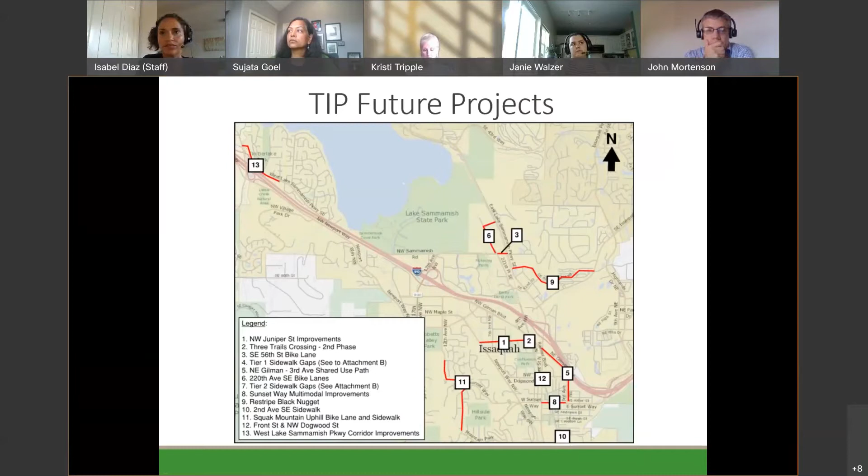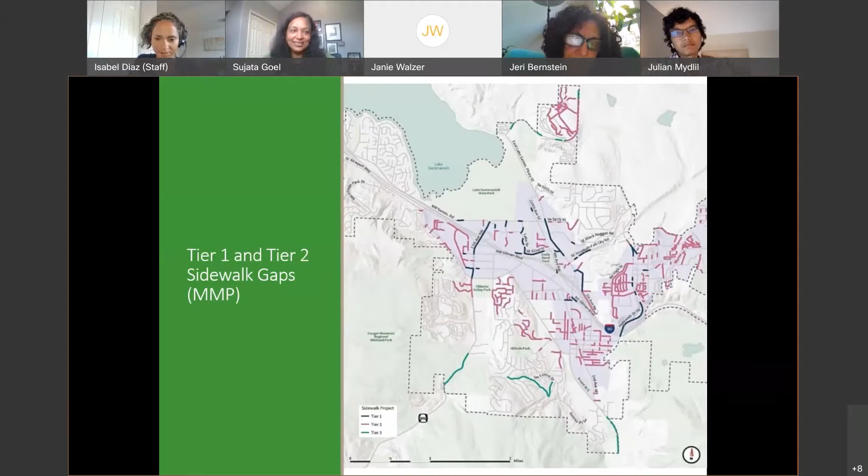It's something the board could provide more specific input on at that time. Yeah, that's something we can do, certainly. Okay, thank you. If there's no other comments, I'll move on to the first project.

For Juniper Street improvements, the main goal of this project is to improve vehicular and pedestrian safety and to provide non-motorized connection between Newport Way and existing trails.

We will be doing so by building a 12-foot multi-purpose trail on the north side, and on the south side building sidewalks only. This project, as currently defined, includes curb and gutter, drainage system, landscaping and illumination. There's a portion of the roadway already built to this standard, so this project will complete the trail along with the road improvements.

One important thing to note with this project is that SEPA environmental documentation will be needed to complete it, and we will also need to determine right-of-way and acquisition needs.

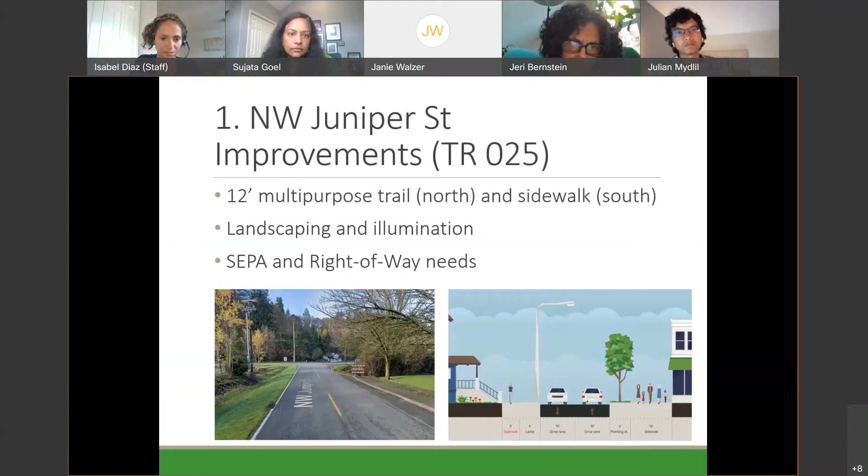The approximate cost of this project is over $2 million. The change we are proposing is, within the project limits, to specifically include those portions that are not completed, like the segments between Newport and 7th, and between Issaquah Coffee driveway and Gilman approximately.

So in this area, we are providing a section where we are keeping the 2 lanes of the road. We are providing 6 feet on the south side of the street where we are only providing sidewalk—there will still be planters, either illumination or planting—and this here is showing a sidewalk, but it'll be the shared use path, shared between pedestrians and bicyclists.

If we go back and think about the goal for this project, which is to improve vehicular and pedestrian safety and provide a non-motorized connection between Newport Way and the existing trails—does the board feel we are meeting our goals with the proposed scope, or are there any other changes the board suggests to make sure we accomplish our goals?

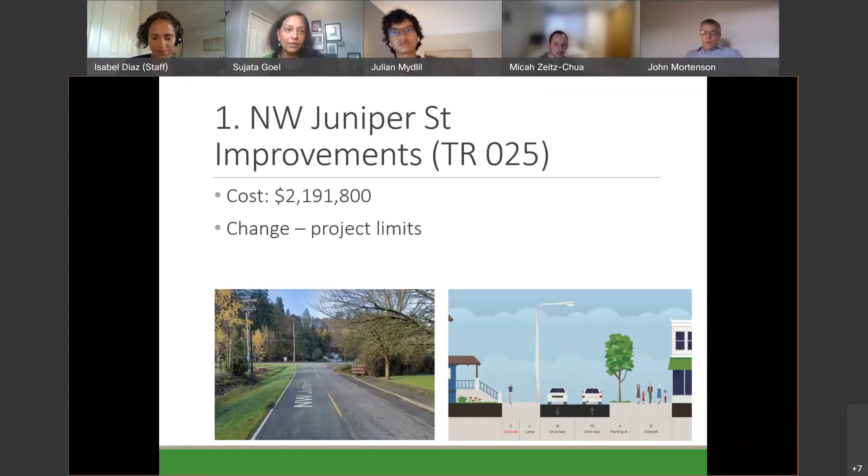Okay, so I think we can move on to the second project: 3 Trails Crossing Improvements. This is the second phase of this project. The main goal is to improve intersection safety and the level of service, possibly by restricting vehicles from turning left from Juniper here onto Rainier.

The crossing—the reason it's called 3 Trails is because of the crossings for Sammamish, Rainier Boulevard, and Juniper trails. So this project will be the second phase, which includes improvements at Juniper and Rainier, and we'll be evaluating access entering Rainier Boulevard from Juniper, given how close it is now to the newly installed signal at this location.

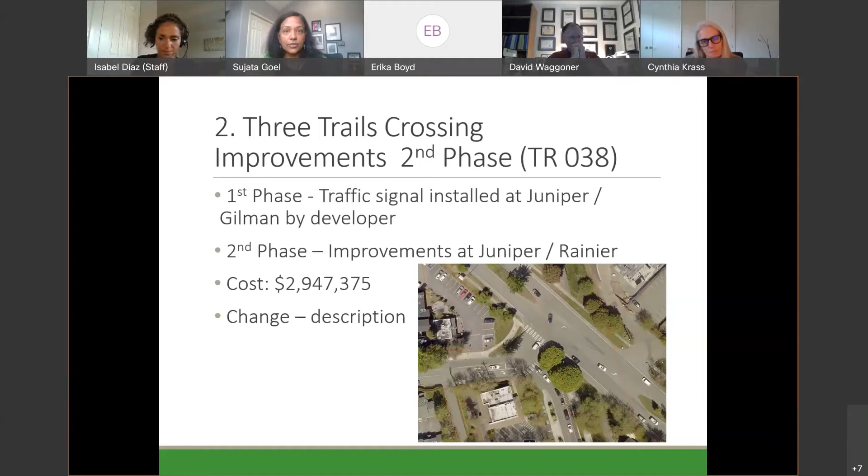So if that one's good, I think we could move on to the next one. Okay, thank you, thank you.

Southeast 56th Street bike lane. The goal for this project is to provide a connection to East Lake Sammamish Trail by providing a bike lane on the south side of it.

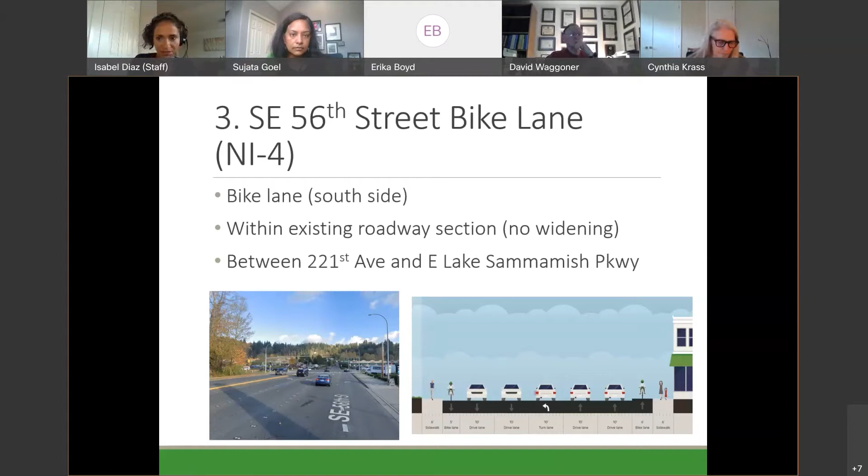We are considering for this one, on the original description of the project, to use only the existing roadway section with no widening. We are specifically talking about that short segment between 221st and East Lake Sammamish Parkway. The cost of this project, as it currently stands on the description, would be between $300,000 and $500,000.

The purpose of the changes we are proposing is to provide an easier connection to King County Trail and added safety to bicyclists. So for this reason, we are proposing this change to specifically include 6 feet of protected bike lane right next to 6 feet of sidewalk. Going back to the main goal of the project, providing this connection to the East Lake Sammamish Trail with these 6 feet of protected bike lane and sidewalk.

Are we meeting these goals? It's important to note that the previous description of the project did not consider any widening, but if we were to put this protected bike lane right next to a sidewalk, we might be looking at minor right-of-way acquisition and widening of the sidewalk area.

Thank you, Isabel. That was actually going to be my question. Are we thinking like a road diet, reducing the lane widths, or some combination of both? Because if it's a $300,000 to $500,000 cost, I was wondering if it was just a road diet, reducing lane width, or if it could be both.

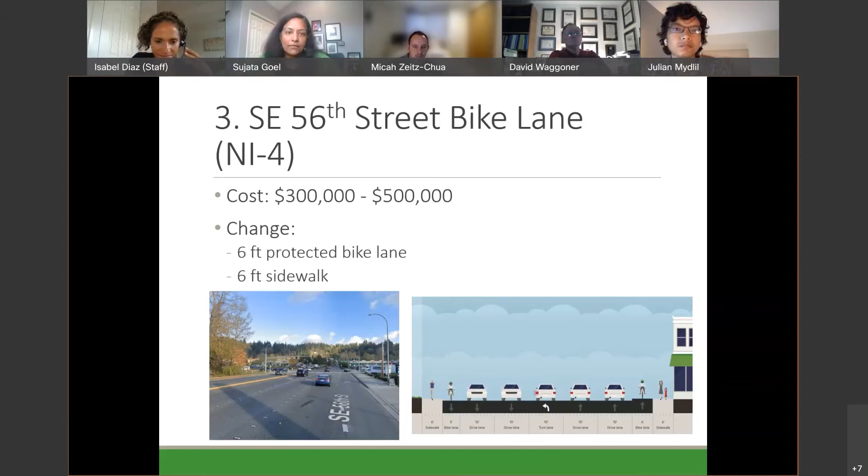And the shared use path will be from where Gilman ends to Sunset Way. The specific bike lane facility will be determined as we go through the design of this project. The cost of this project ranges from $3 to over $4 million as it has been defined. The changes we are proposing for this project are to specifically call the bike lane an LTS2 or better, and to include sidewalks on both sides of the street. The reason for this change is to provide more detailed information on the improvements and the desired level of comfort for the new bikeway facility.

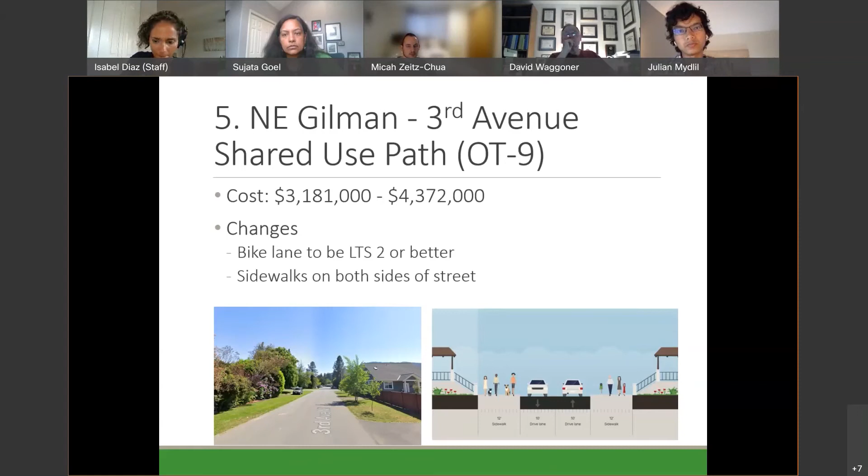On this area here? Yes, so there's 2 lanes of general traffic, you could take out 1 on each side. I think John wanted to add something. Yeah, I think that's something we can definitely look at, because it might make it a little bit easier to accomplish this project, and like you said, it is kind of an underutilized area. The right of way there is 200 feet, so as Issaquah continues to grow, that's definitely a place where new things should be able to come in.

Thank you, Julian. Looking at the chat, it sounds like Jeri and David both fully concur with this improvement and evaluating this improvement. Cynthia had a question wanting to know if the ped-only crossing over the East Fork would remain non-motorized. If so, she would love for that to remain non-motorized, a special path available only to the non-motorized. That could maybe be a piece of design consideration.

I can add a little bit onto that. This project would replace that with a non-motorized bridge that would be wider, but it would be non-motorized - it would not be a motorized crossing. Excellent, that's a good piece of information to have.

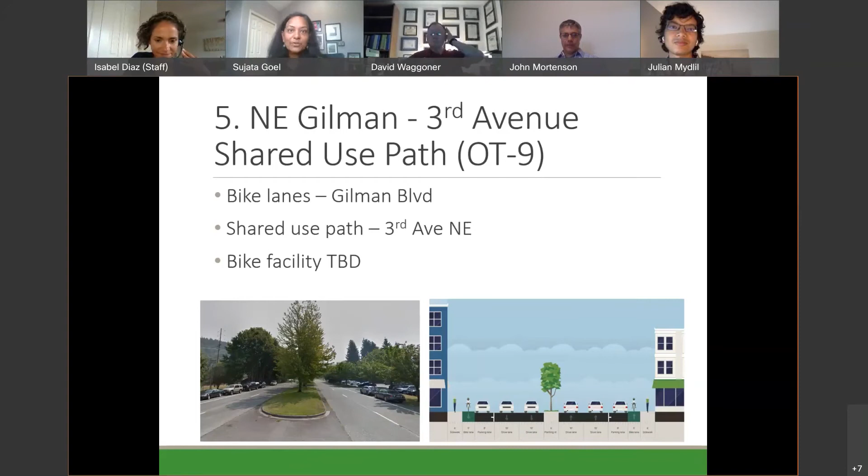So overall it sounds like the board is very supportive. Are you guys getting this theme that anytime you want to add bike lanes or non-motorized paths, we all start smiling and are very happy? So far I think the board is very supportive of this evaluation of this project as well. So if we want to move on to number 6. Thank you for your input.

220th, bike lanes. The goal of this project will be to aid the bike network by connecting the employment areas to the East Lake Sammamish Trail. This project will be constructing 5-foot bike lanes along 220th and 51st Street, on that section close to the section we were just talking about on 56, but on the other side, on the north side of 56. It is assumed that this project can be accommodated within the existing roadway section, so no widening. In order to do that, we will need to accomplish restriping and removal of the median on 51st Street, and repurposing the two-way left turn lane on 220th to accommodate the bike lane.

To be able to do this project, signal modifications may be required at 220th and 56th Street, since we will be removing one lane from that approach to the intersection.

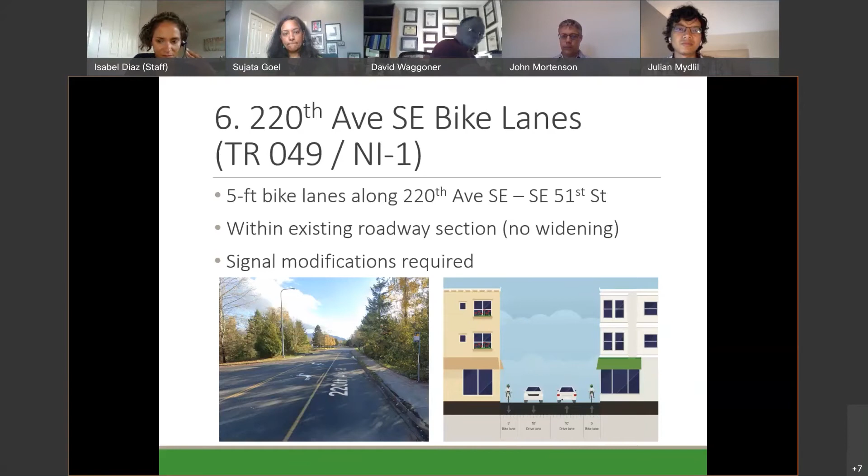The estimated cost of this project is approximately a little over $700,000.

No changes are being proposed for this project. The main reason is because project modifications may have impacts to capacity, and since we are currently going through concurrency updates, we are not proposing any changes until this process is complete. But we will still be asking the board if the scope as currently described would meet our goals of connecting these employment areas to the East Lake Sammamish Trail.

I think David and then Julian. So would that also include 51st that you're going to put bike lanes on as well?

Yes. Just one comment as a former bus driver: if you look on the side, you'll see that's a bus route that goes through there, and there is a bus layover on 51st Street. That's not that important, but my guess is if you put that bike lane in there, you're going to have to contact Metro to get rid of that bus layover. That's the only comment I had.

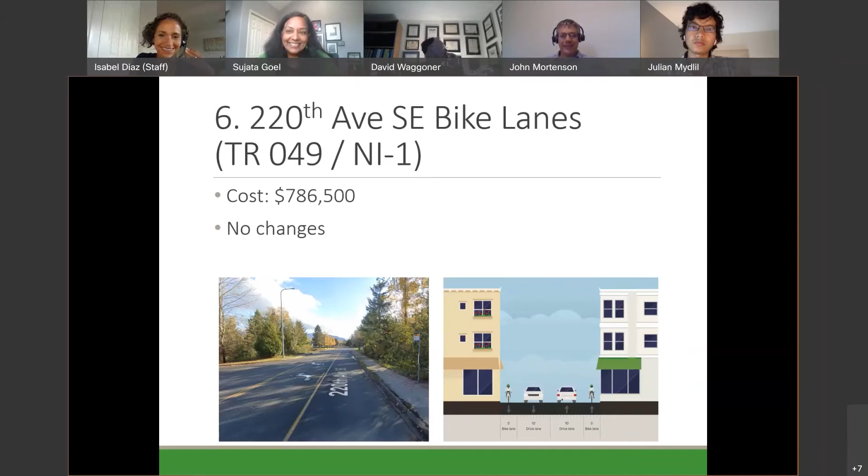Sunset Way multimodal improvements. This project has been identified in the Walk and Roll plan to include a cycle track, and to address operational issues with left turning movements at intersections along the corridor.

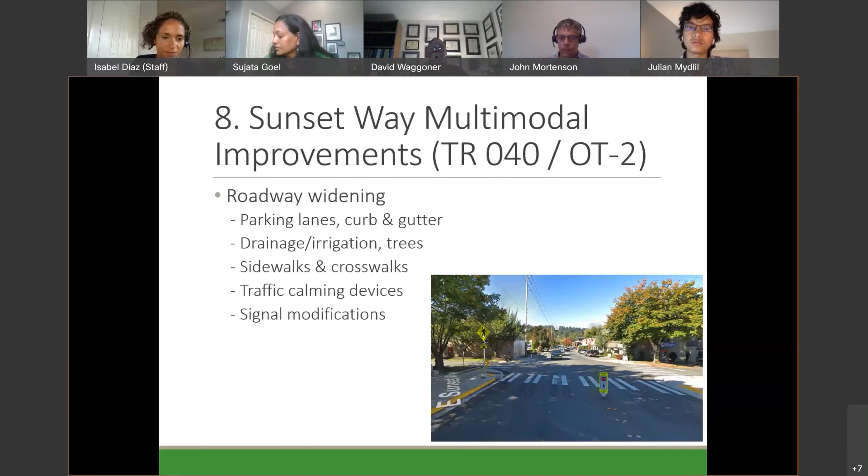This would be accomplished through roadway widening, approximately over 2,000 linear feet, including parking lanes, curb and gutter, drainage, trees, sidewalks, crosswalks, and traffic calming devices. Modifications will most likely be needed to the existing signal and geometry at the Front Street intersection for this project to be completed.

The cost of this project ranges over $15 million. The proposed changes we are including are safety improvements on Sunset Way and Fifth Avenue because of the history of collisions at this intersection.

We'll also include a bike facility, not specifically a cycle track — that is to be determined, since we no longer know if a cycle track is appropriate, and because a cycle track would potentially eliminate on-street parking in this area. This bike facility will be LTS2 and would include sidewalks on both sides for this project.

Since we don't feel totally sure what is going to be needed for this project, we will most likely start to engage the community. Since we will be engaging the community in the future for this project, the question we will be asking the board is a little bit different: what issues would you like to be solved at Sunset?

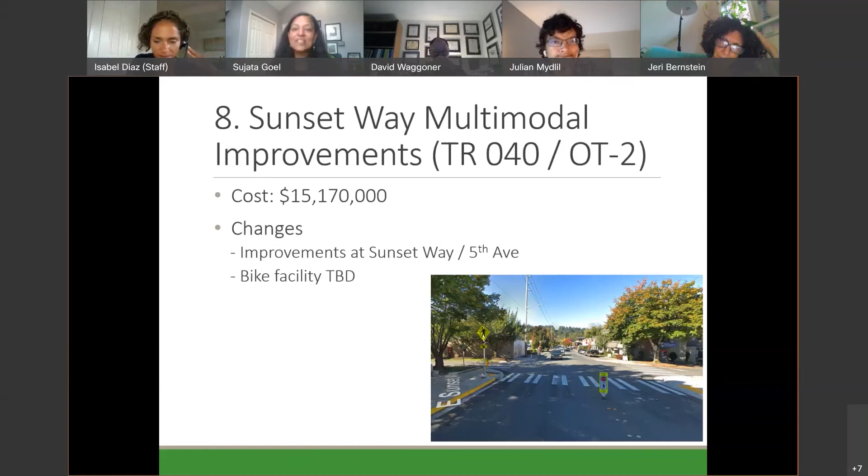Restriping Black Nugget. The goal of this project is to improve the roadway capacity, safety, and efficiency along Black Nugget. This project will include the addition of an uphill bike lane on Black Nugget between East Lake Sammamish Parkway and Issaquah Fall City Road.

After a site review, we found that this roadway was too narrow to accommodate a restriping and provide bike lanes, which would require widening of Black Nugget or removal of the two-way left turn lane. Because of the large retaining wall on the north side, and some driveway grading issues on the south side, it would become really difficult to widen this roadway.

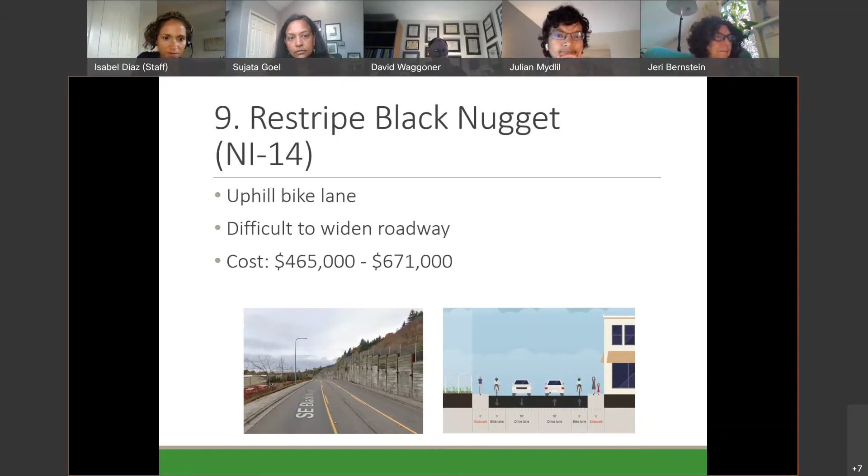The cost of this project is estimated between $400,000 to over $600,000.

The changes we will be proposing include removing the center turn lane to provide an uphill bike lane, and narrowing the through lanes as well. Repurposing the existing two-way left turn lanes to provide bike lanes may require signal modifications on East Lake Sammamish Parkway and Issaquah Fall City Road. Also, before we get into removing any two-way left turn center lane, we will need to evaluate the turning movements at Home Depot and Fred Meyer driveways.

To remind again, the goal is to improve the roadway safety and efficiency on this area, and we'd be accomplishing this with the project scope and the changes we are proposing. Thank you, Isabel. I think Joseph has a comment, and then Christy has a question.

I have a really quick comment. My main concern for this one, because I looked at it on Google Maps, is that it's really hilly, and especially in fall and winter when it becomes rainy or snowy, the road can become icy or slippery, which might be hazardous for cars or bikes. I feel like it'd be better if it was a protected bike lane rather than just a regular bike lane where a car could accidentally skid into the bike lane. That's just my personal opinion, but yeah.

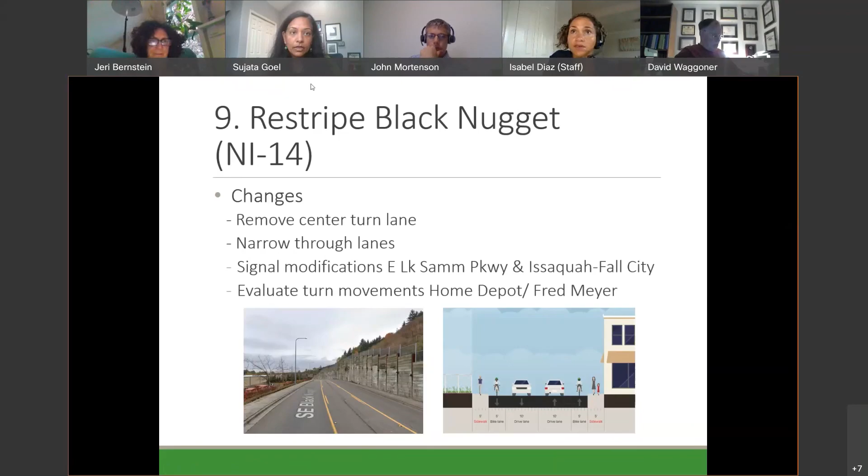So I think now we can move on to the reports. It looks like maybe the board work plan is the first report. Yes, let me stop sharing my screen so we can. Oh, hey, everybody. Bring the board work plan, yes, will be the next item.

So for the next meeting in September, that will be September 16th, we have a few items on the agenda, and we are going to confirm if we are ready for all of the topics, or we would be moving some of them. The items in discussion are to continue with the Transportation Improvement Program project update, discuss the transit system, and the Northwest Sammamish Road non-motorized project discussion, which we had scheduled for this meeting but had to move to the next one.

And we also have for that meeting the racial equity discussion. So we probably want to discuss whether there are a few of those topics that could be moved to another meeting, because we have 4 topics on the agenda, so we probably want to discuss if we would continue with those 4 topics or move things around.